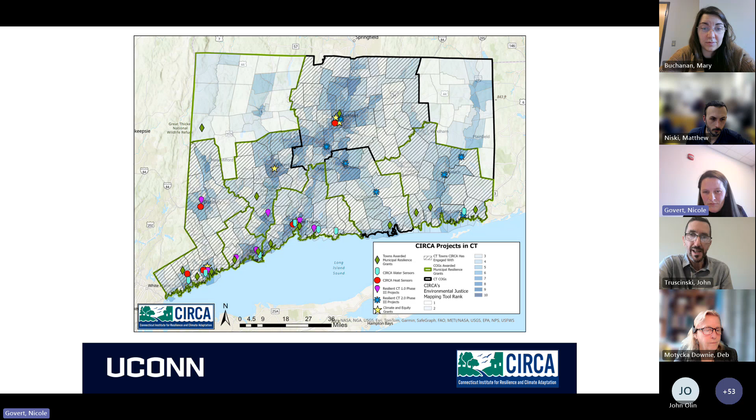I'm going to pass it over to Deb Downie, who is with the town of Stonington, to kick us off with the town's perspective about the flooding issues in Mystic and their participation in the project. So take it away, Deb.

Thanks, John, and thanks everyone. I'm happy to be here today on behalf of our Board of Selectmen and others who've been working hard with Fuss O'Neill and CIRCA on this project. Mystic is a unique area, including portions of two towns, as well as historic, culturally significant residential, commercial, and industrial areas. Its proximity to the sea, the river, and tributaries are both the source of its charm and now the source of ongoing damage.

We've become more aware that for decades, Mystic and the upstream areas continued to develop and expand without much understanding of future impacts. Sometimes temporary structures became permanent with no regard for tidal reality, or regulations required extra large parking lots at some commercial businesses. Amtrak has also altered the shoreline, constricting flow in some areas. The presence of multiple buildings, continuous pavement, and other impervious surfaces have accelerated the extent and incidence of coastal and inland flooding.

These concerns are coupled with the presence of important infrastructure and cultural resources along the river and coast. One of the most vulnerable is our wastewater treatment plant on Edgemont Street near the confluence of the Mystic River and Mystic Harbor. I grew up in Connecticut and spent a lot of time in Mystic and Stonington, and in the past, except for major hurricanes, we never saw the kind of flooding we've experienced in the past decade. We have frequent flooding in downtown Mystic and on the outskirts of the village on Route 1, Route 27, and Masons Island Road, just to name a few.

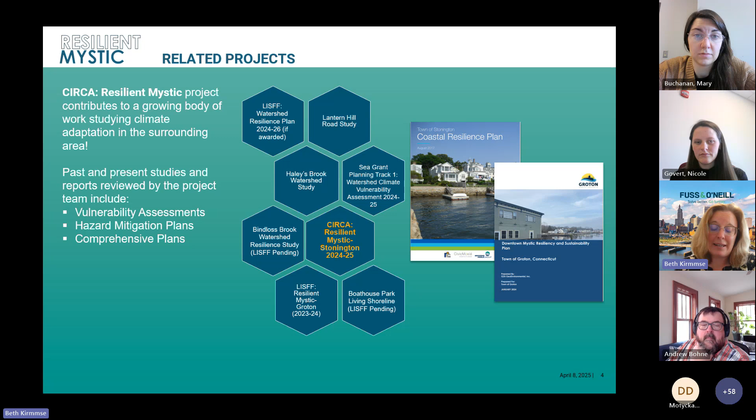When we started this project, we were very much aware of its position within the region, as one of many efforts being put forth or recently completed in the area to think about resilience in the Mystic River watershed and surrounding areas. For example, Groton was funded for a similar study, which wrapped up January of 2024. We started this project amongst a number of things going on, and have sought to coordinate with them where appropriate, in particular through the involvement of the CTAC, that Community and Technical Advisory Committee.

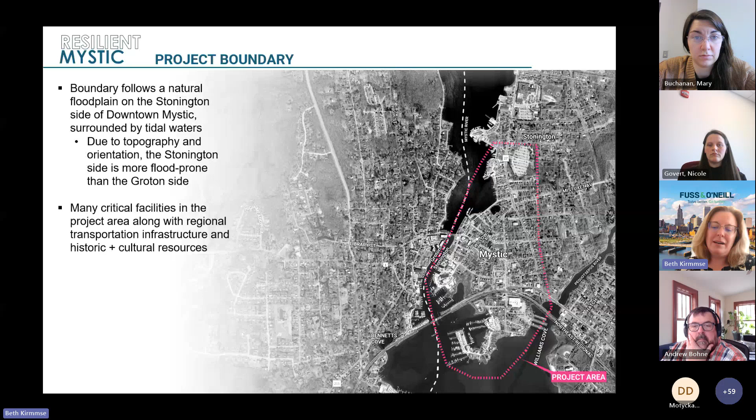So, understanding the risks. The project itself, the bounds of this project, we are looking at the most vulnerable areas of downtown Mystic on the Stonington side, the low-lying floodplain areas. There are many critical facilities in this area, critical transportation infrastructure, 2 major state roads, an evacuation route, as well as the Amtrak corridor.

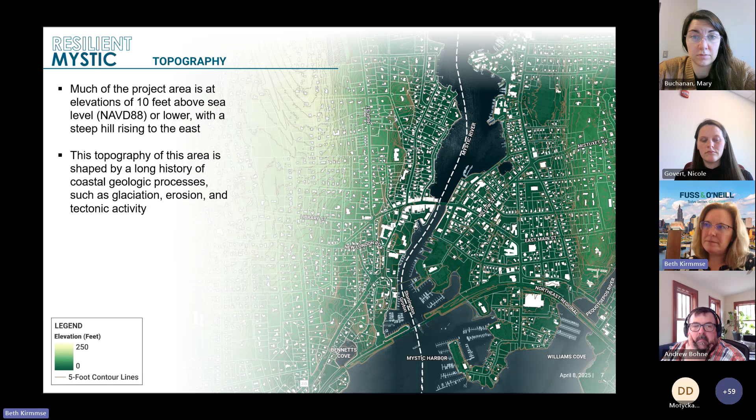So when we started this project, and something that is really important to put forth at the beginning, is that this project looks primarily at sea level rise and tidal flooding and storm surge flooding. Flooding risk that is coming up the river from Long Island Sound. We are very much aware that there is risk from pluvial flooding coming down the hillside that we were just looking at in that last slide, in the lighter green tones. So we recognize that any solution put forth will need to be tested for its applicability to mitigate risk to both types of flooding without exacerbating one or the other.

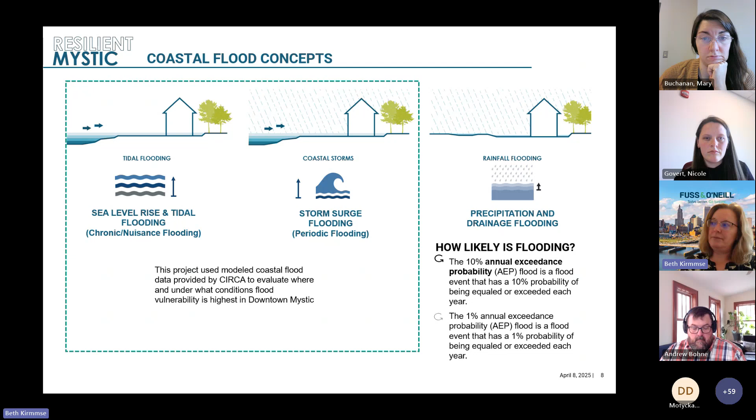Still, our study is focused primarily on what you see in that dashed line. So what are the risks? So what you're looking at here is... I'm sorry, my screen just glitched for a minute. I apologize, let me just bring that back. Apologies, it disappeared here. Oh, I'm so sorry.

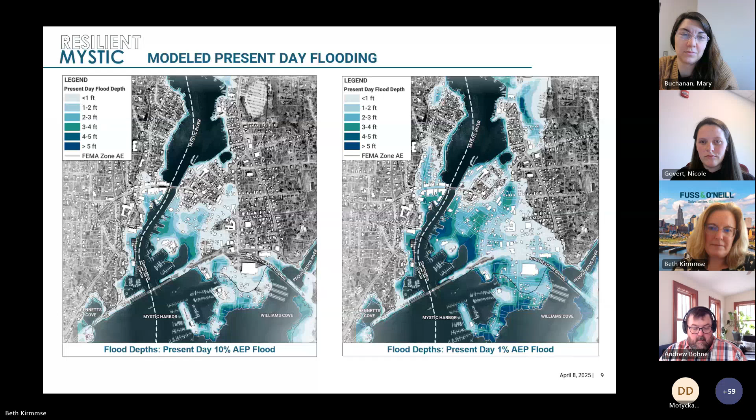Okay, I didn't make the same mistake that time. So with my keyboard, great.

Well, this is really exciting. Now my cat is joining the webinar. We're just going to keep rolling here.

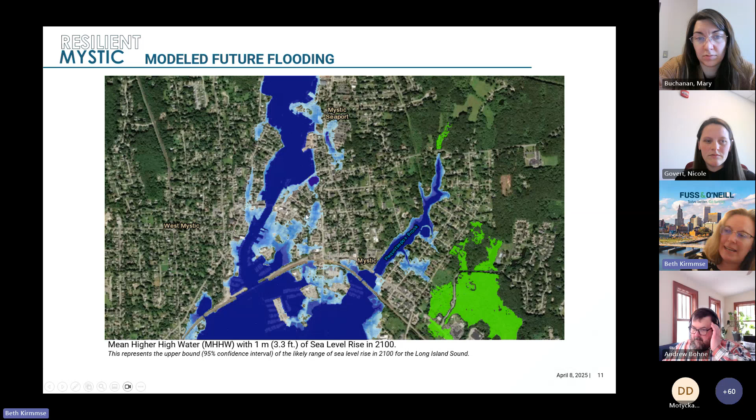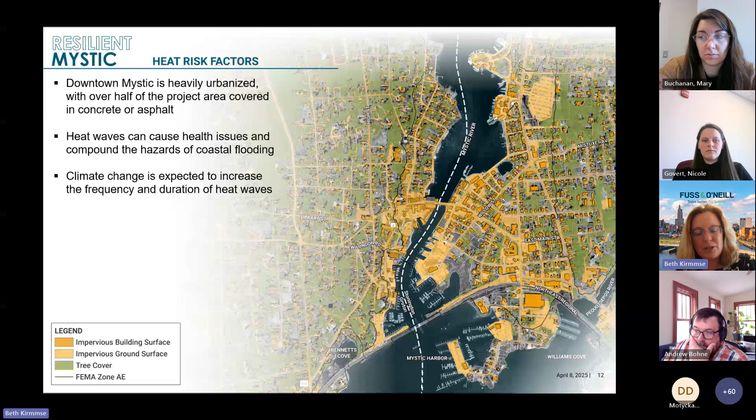Additionally, there are conditions in our built landscapes that exacerbate flooding, represented by a full range of impermeable surfaces. Those impermeable surfaces tend to contribute to extreme heat events as well. So in looking at flooding risk in downtown Mystic, we're also able to look at extreme heat risk at the same time. When considering nature-based solutions, we're hoping to provide mitigations for both.

So what's at risk? We're looking at a map of the Mystic River area, showing our project area in the floodplain, bound by the hillside on the right.

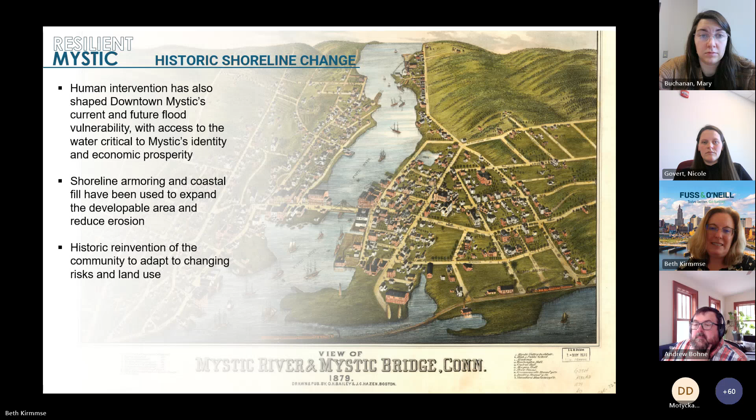Flooding in Mystic can cause physical damages to structures and their contents, human impacts such as residential displacement and injuries, direct or indirect business impacts, and reduced functionality of public and essential facilities such as fire stations, rehabilitation care facilities, and churches.

This map shows the vulnerability in a 10% annual exceedance flood event to a variety of land uses. Residential is in yellow, industrial in purple, and commercial in that pinkish color.

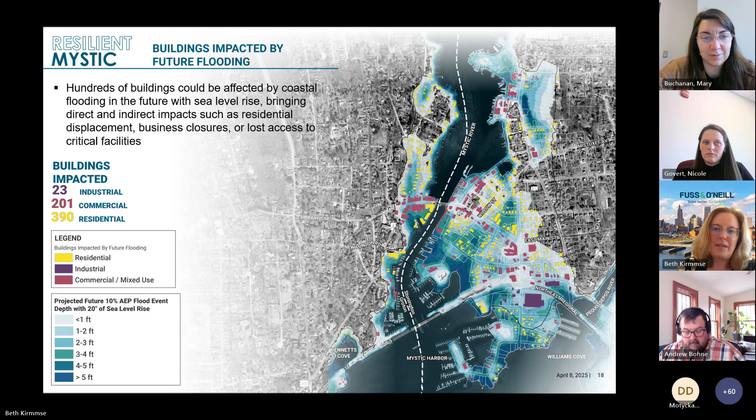Coastal flooding in downtown Mystic also brings severe impacts to critical transportation corridors. Route 27 is an evacuation route. Route 1 is a very important corridor between Groton, through coastal Stonington, and the southern edge of the town of Stonington. Additionally, the Northeast Corridor trains stop in Mystic daily, you can see the train station icon here, and here's the Northeast Regional Rail line.

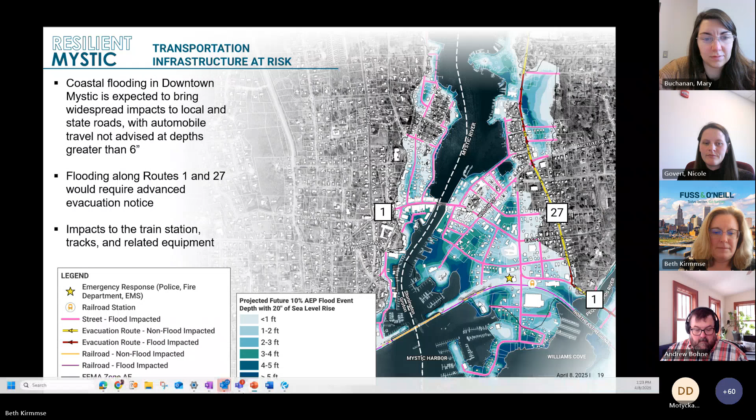So what are the regulatory areas we have in this area as well? We wanted to be cognizant of all the different overlays and permitting processes that would need to be engaged in order to mitigate flood risk. We're looking at a federally regulated channel, wetlands on the National Wetlands Inventory, FEMA zones, a town-managed shellfish bed, etc.

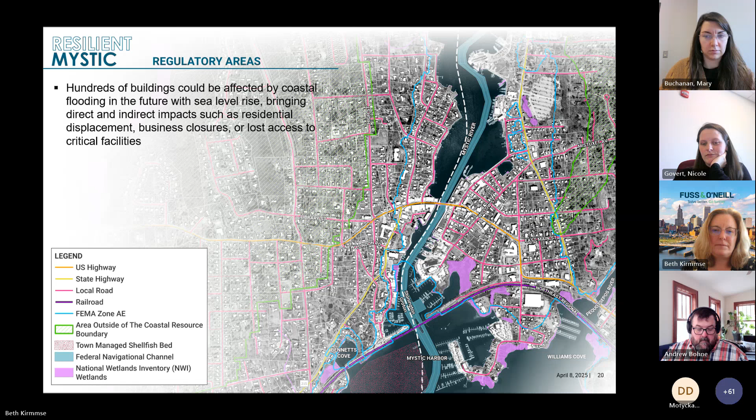As we mapped this and thought about critical infrastructure at risk, there's the wastewater treatment facility, storm drainage, and public drinking water supply lines, all of which are separate services but all at risk. And when they are at risk, they could end up impacting one another.

My cat would really love to be a part of this webinar.

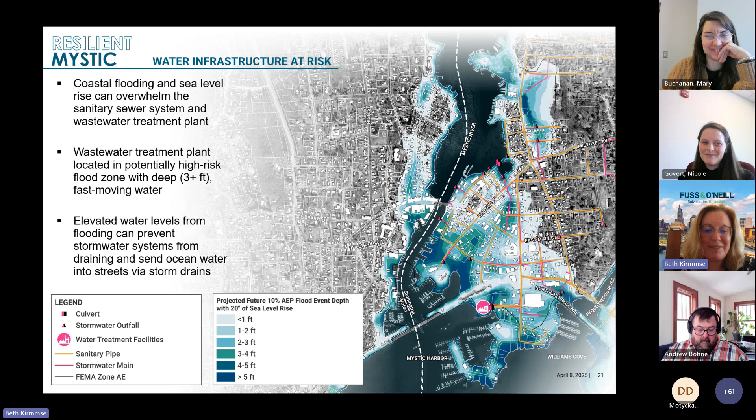Additional critical community assets were assessed through the planning and assessment phases of this project, and we identified a number of facilities. Most importantly, that hot pink dot, number 4, the wastewater treatment facility.

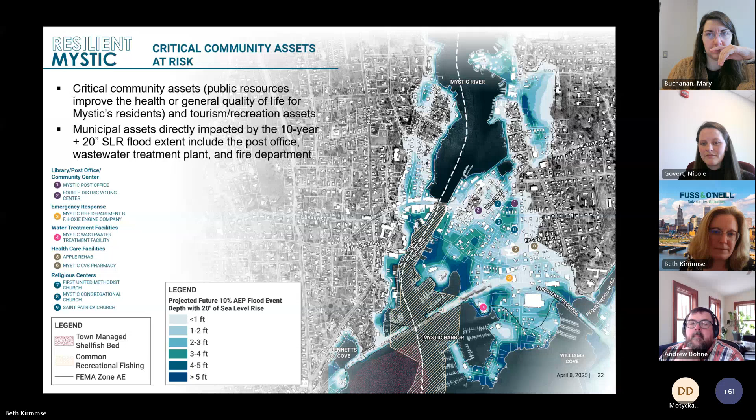We also looked at historic resources at risk. There are a number of historic districts that surround this area, but it's of note that the downtown area in our project area has not been part of a district overlay, although there are a number of facilities in that area on the National Register of Historic Places, a federally recognized designation.

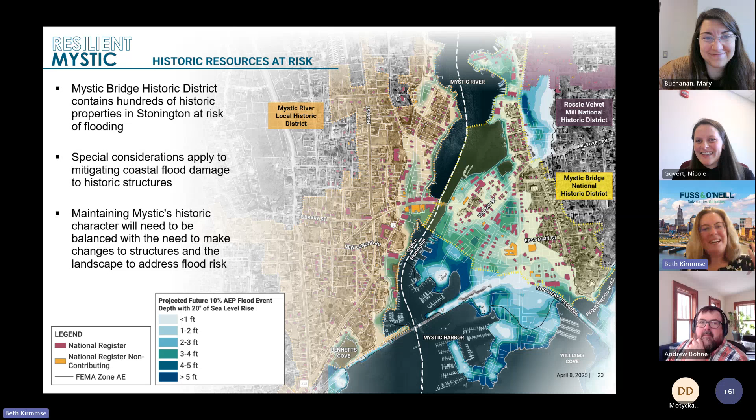Perfect. I'm about to hand it over to Andy for the workshop summary.

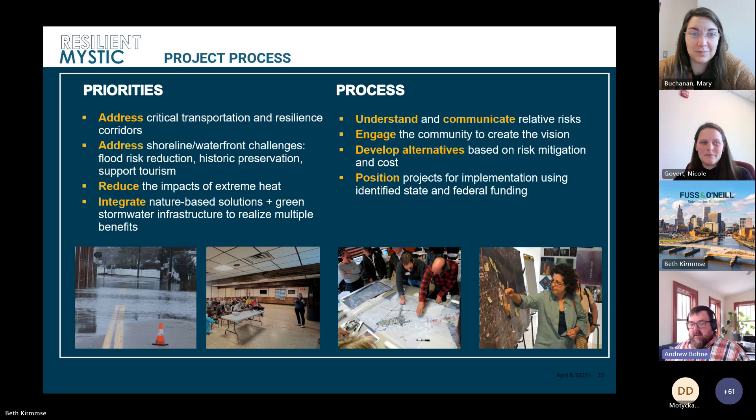So the workshop was really designed to be an inclusive engagement event that allowed as much access and opportunity for the community at large to be part of the process.

This was done over a period of 3.5 days with a variety of workshops, walking tours, visioning exercises, open houses, and then a final presentation.

You can just click through these. This is some representation of some of the workshop events that we had, the information that was gathered, and different focus groups that were integrated into the workshop.

We do a lot of visualization boards, really trying to engage the community in a sense of design language. We asked people to weigh in on the intent.

With the red dot, green dot for different areas, we got a gauge for what people like, what they're interested in seeing, what the aesthetic looks like, so we can start to use this in a variety of different ways. Very good engagement, really good feedback, got a lot of community involvement.

Beth, the next piece is the historic resources. Do you want to jump into that? Sure, I'll touch briefly on this.

As I mentioned before, there are many National Register listings in Mystic, so we looked at ways to think about what has come before in terms of other places addressing the same thing. We looked specifically at Charleston and Newport, looked at their regulations, and thought about small scale adaptation.

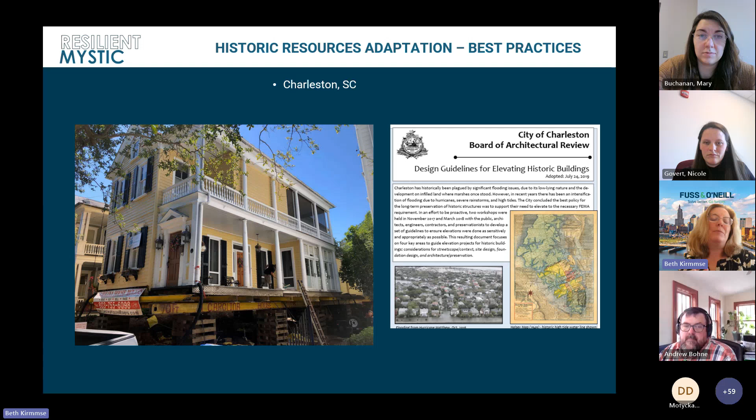The historic nature of Mystic is one that has changed over time, but each time it changes, pieces of what makes Mystic and gives it that historic character have been held onto, even when they need to be reshaped to meet changing cultural needs. The last time it was reshaped significantly was when the shipbuilding industry was exiting, but Mystic chose to hold on to some of their historic assets by relocating them strategically.

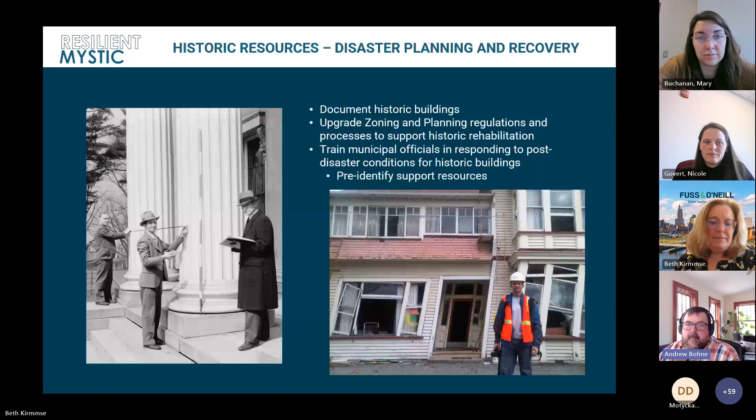I'll go through this as quick as I can but still be concise. Generally we focused on a series of areas to do a deeper dive into understanding what some of the flood mitigation and adaptation strategies might be.

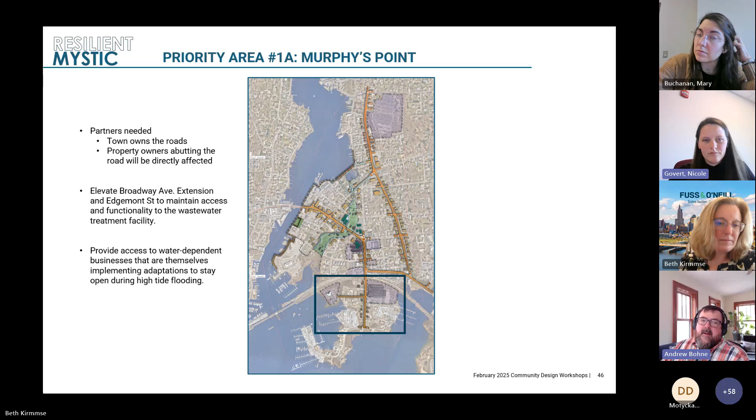In priority one, we looked at Murphy's Point on the south side, really looking at opportunities for elevation of roads and doing everything we could to maintain critical access to the wastewater treatment facility.

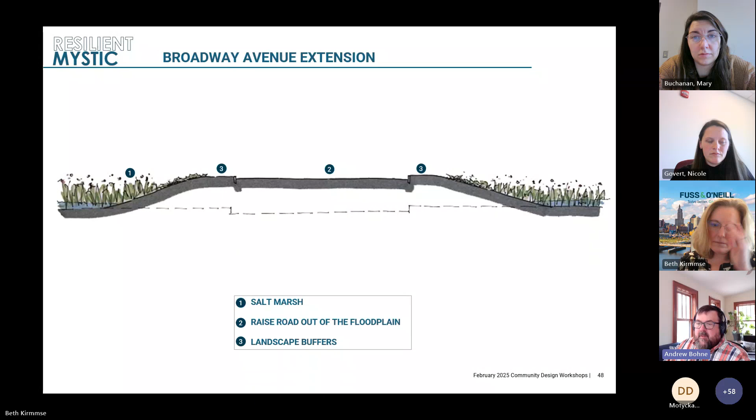The next slide shows a bit of the intent of the road elevations and what this could do to make sure we have access off the site. The next zone we looked at was just north of that, again looking at opportunities for elevating roads where we could. Are there opportunities in this zone?

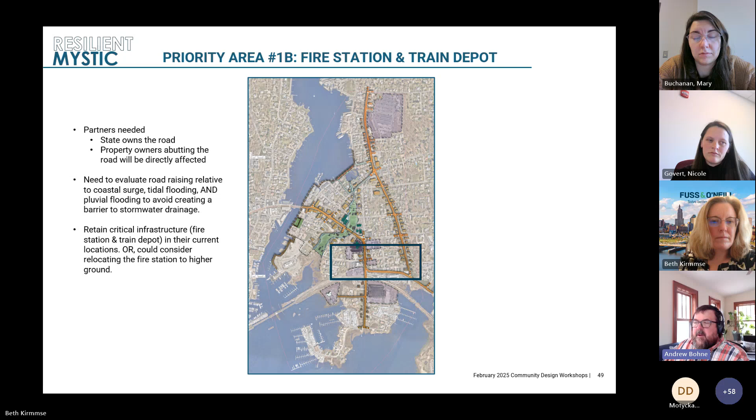For allowing the water to come in certain respects into certain areas, looking at potential opportunities for strategic acquisition, relocation, moving critical structures out of risk, and also looking at infill in the same capacity.

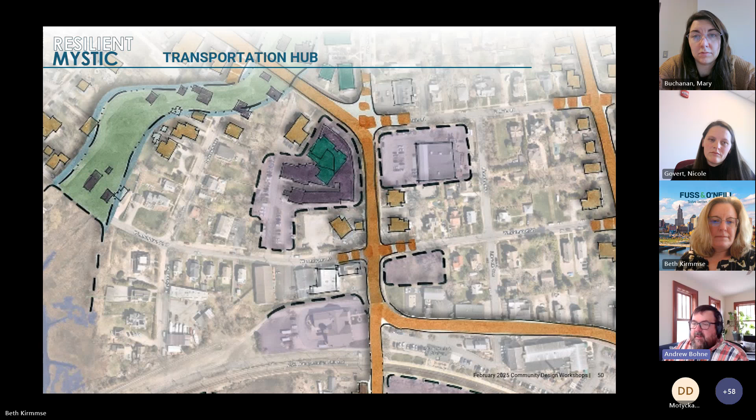The next area we looked at was Main Street, really looking at what we could do to strategically identify infill opportunities that were resilient in the face of this changing climate.

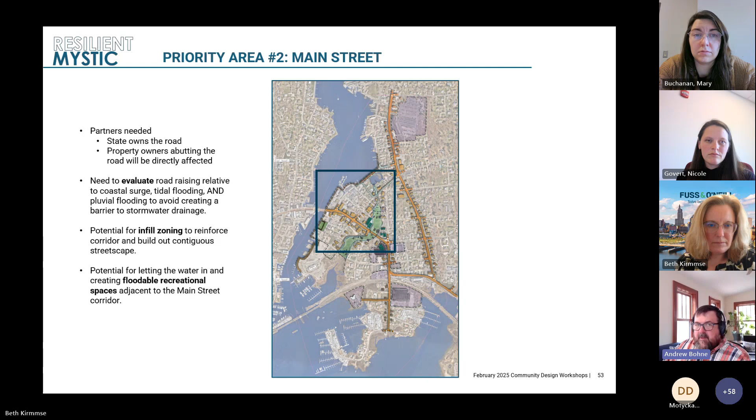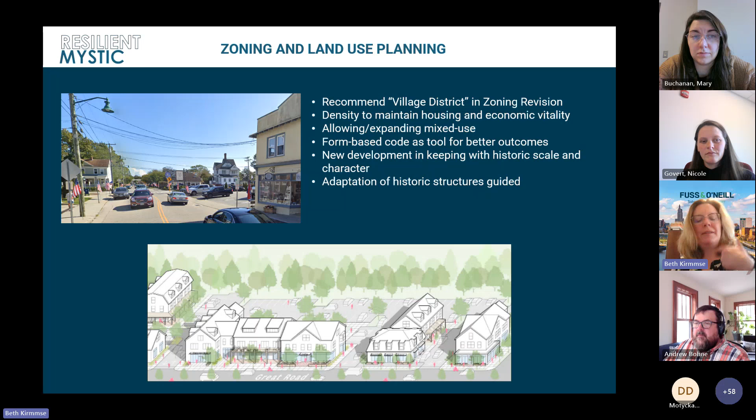One of the ideas was that infill piece where there's potential change that could be led by zoning regulations, put in place as that baby step now that incentivize change over time. And looking at road infrastructure as it is today, and the potential discontinuation of vehicular traffic, converting it to multimodal and pedestrian traffic.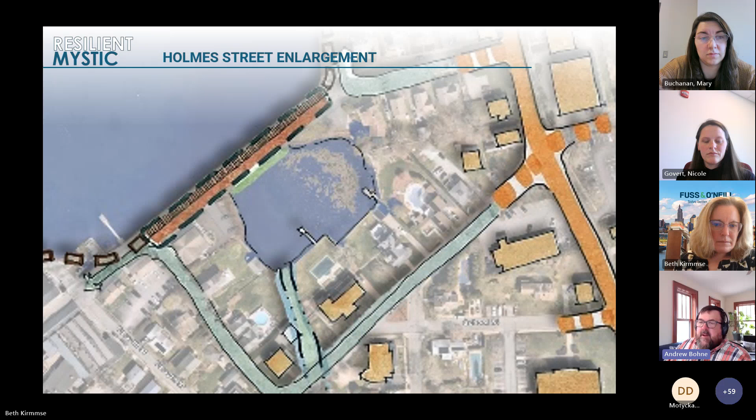This shows the different graphic representations of what Holmes Street could turn into, while still allowing those floodwaters in.

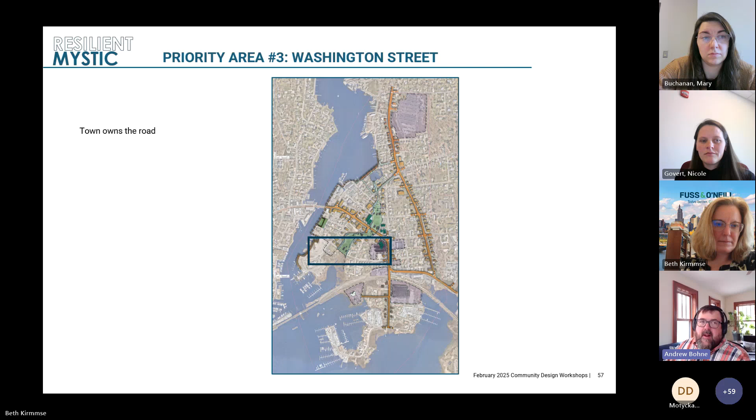Priority Area 3 was the Washington Street area, and the town owns the road here, so we looked at what elevation could look like to give a level of protection, understanding and exploring what that looks like.

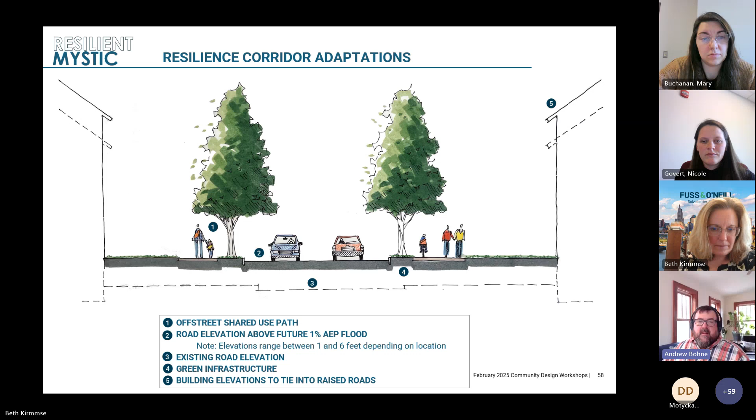If the road comes up, what buildings need to come up to make sure we meet that elevation, to still have that historical context was a key component to that.

Also looking at the green infrastructure and the streetscape around this area, and how we could let that water come in over time, but knowing it's not going to be underwater all the time. So still using it as a high functioning, high value landscape.

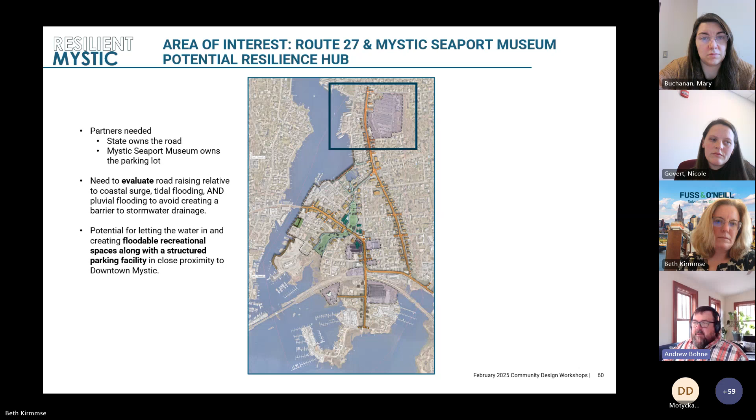The last area we looked at was on the north side of the project area, around Route 27 and the Mystic Seaport. The state owns the road here, and the Seaport Museum owns a very large surface parking lot. So we looked at opportunities here to zoom in and provide opportunities for that road elevation.

Road elevation, consolidated parking, potentially a parking structure, lots of green infrastructure, multi-use landscape, allowing this kind of floodable landscape to function, and still potentially converting some of the surface parking lot into a living laboratory outdoor landscape for the community and for the seaport to use moving forward.

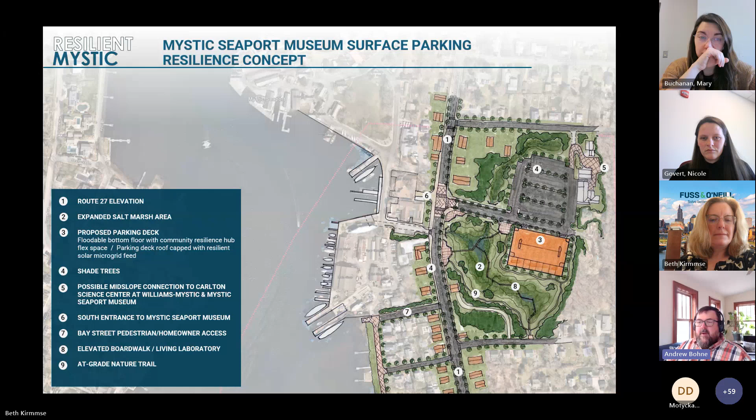Thanks, Andy, for running us through that so fast. These are in-depth concepts, so we're just hoping to hit the high notes in this webinar. But we do still have an opportunity if you want to take a look at our project area.

We're still accepting input from the community. If you want to provide input, we have the project story map, and you just click to open the points of interest map. There you can drop a pin and provide us any input you have, either as a resident, someone who works in Mystic, or someone who visits Mystic. Since tourism is such an important part of the Mystic project, it's important to hear from everyone, even if you don't live or work in Mystic.

You can also upload pictures for the project's use, and this will be handed over to CIRCA at the end, and to the town of Stonington, used for gathering and positioning future projects for funding as well.

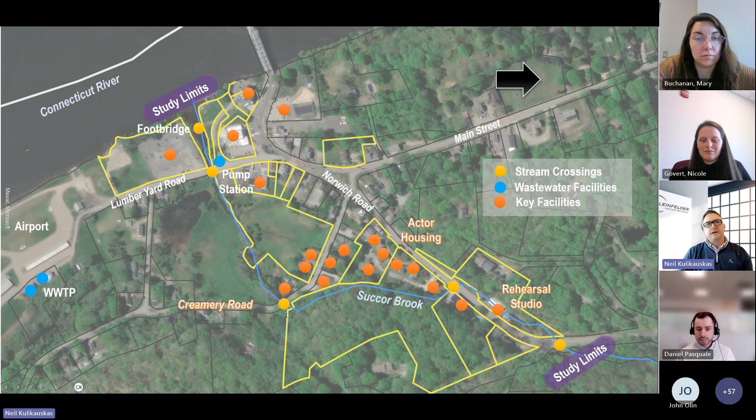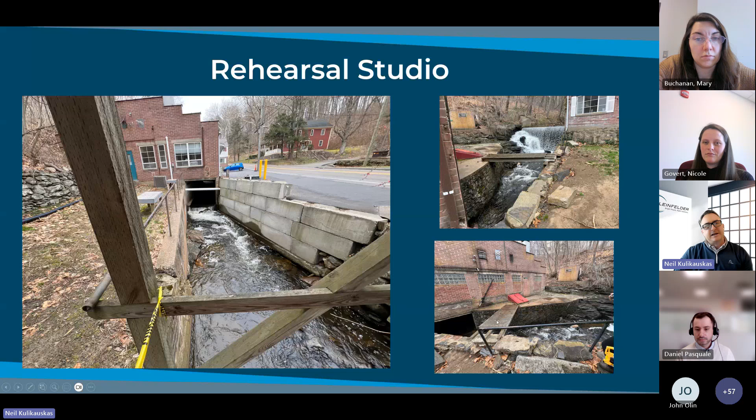So again, moving on here, just to give you what we're dealing with, this was our site visit. This is the rehearsal studio. As you can see, the stream is culverted beneath the studio. The picture on the left is really the outlet of it. Just upstream there's a small dam here. Again, as John mentioned, it was an old mill town, constructed dams and these constrictions to really harness the power of the water. Then down on the lower right, this is basically the inlet to that culvert. So a real challenging space here.

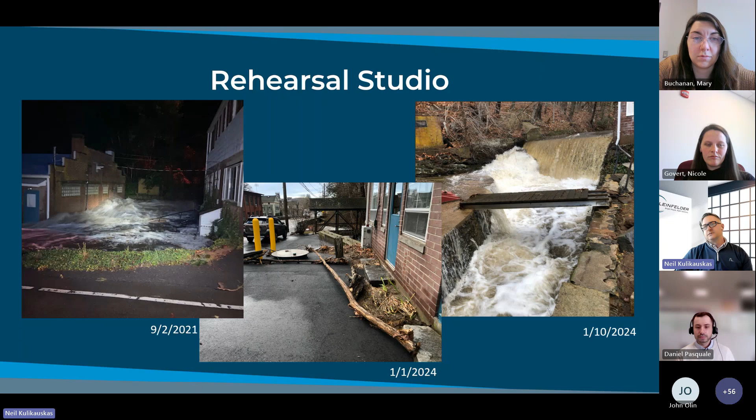Let's advance. Okay, I mentioned the actor housing area. So again, here you have some newer properties built along the floodplain of Succor Brook, as well as some historic properties that are affected as well.

So again, some of the flooding impacts we've seen from these properties — this is from September 2021. That same September flood caused major flooding around these properties and Norwich Road, as you can see from these photos.

And then this Creamery Road crossing — you can see this is a typical box culvert that you see all over the place in New England. You can kind of see just at the normal water level it's really creating a constriction of the stream, and we'll see how that constriction exacerbates some of the flooding issues within Succor Brook.

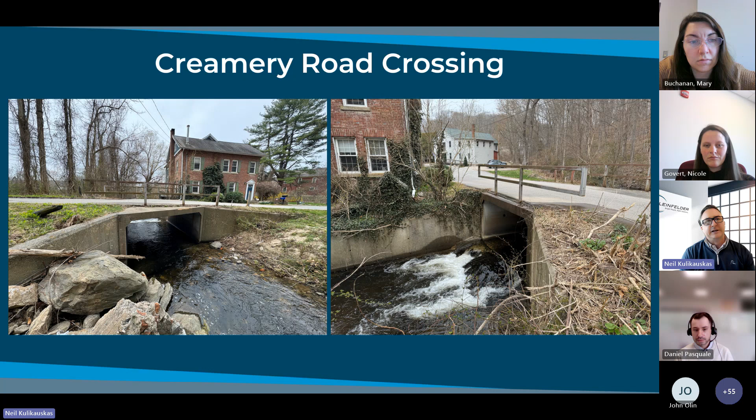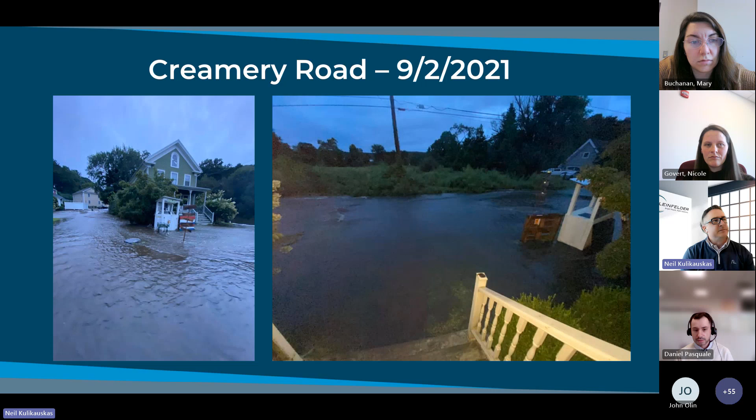And then we've got a couple photos of the properties adjacent to and surrounding this Creamery Road area. Again, during the September 2021 storm there was major flooding through this area. And more recently, in January 2024, we were able to see evidence of overtopping of this culvert — you can see the debris caught up on the surface, which shows that the whole culvert overtopped fairly recently.

So that's the overview, and those are the areas we're going to focus on.

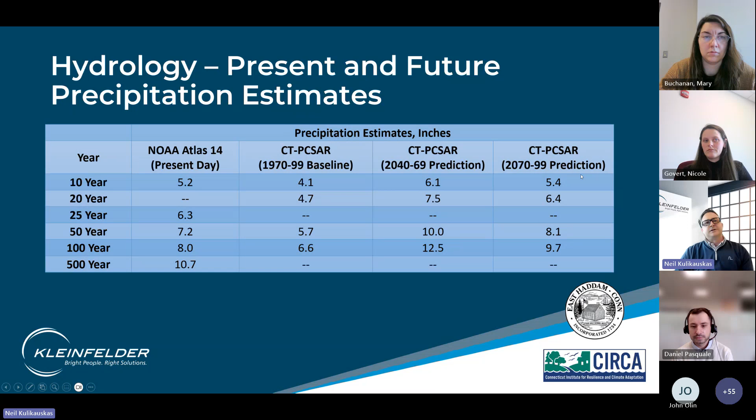Now I want to talk quickly about the modeling we did. At the beginning, for the hydrologic work for present day, we used the NOAA Atlas 14 precipitation, and for our future estimates we're using the PCSAR predictions. You can see significant increases comparing present day to the PCSAR mid-century prediction — the 100-year storm goes from about 8 inches to 12.5 inches. It's notable too that by late century these numbers actually go down from mid-century, based on the climate models.

So what does that look like for flows? Again, present day is in this bottom row, and we looked at a few different methods to calibrate our analysis and make sure we understood what each method showed. Present day, we're looking at flows for the 100-year event around 1200, and mid-century as high as 2400 — a significant increase.

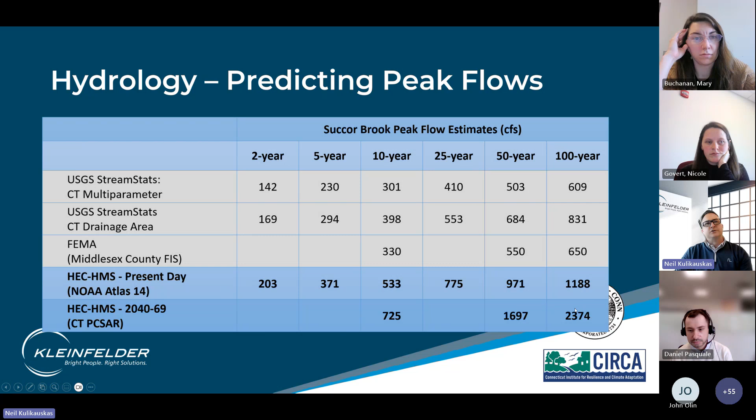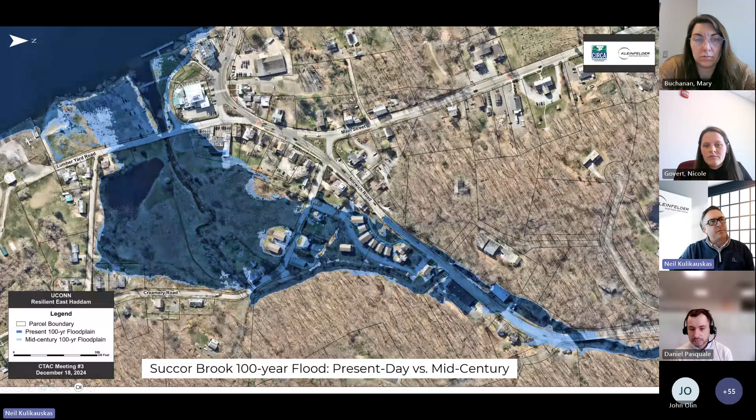So what does that show? This is our study area — the change in the floodplain for the 100-year event from present to mid-century. What you can see is the floodplain itself doesn't change that much. The most notable area is this lower right-hand section, where the bridge starts overtopping and creates additional floodplain, and a bit at the mouth of the Connecticut River as everything spreads out. But within the reach, the floodplain is pretty close. And these are all the different assets and facilities within the floodplain that are being affected.

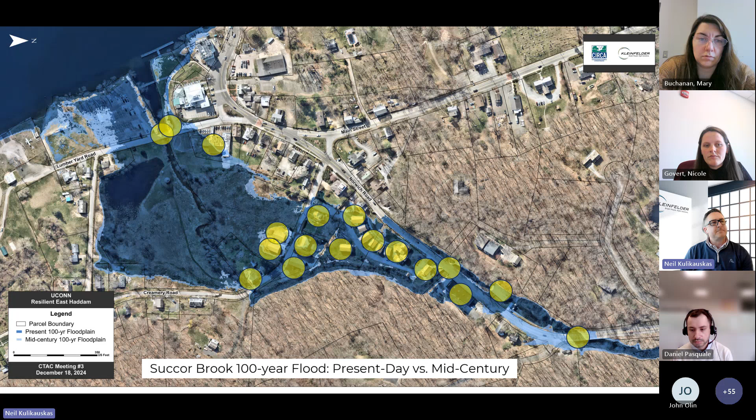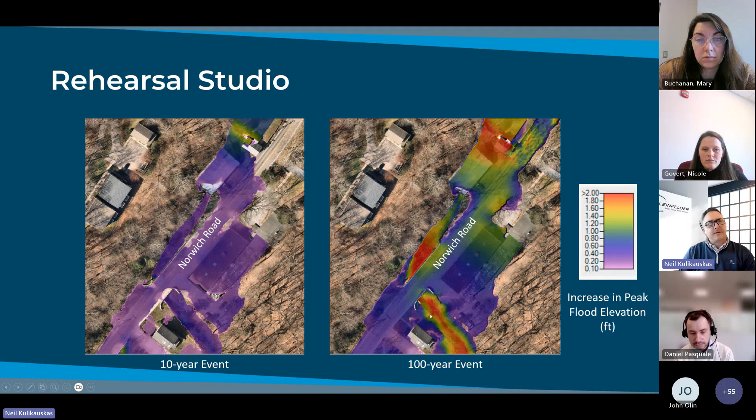What's shown here is the actual relative increase in the 10-year event from present day to mid-century. So you're seeing a small relative increase on the 10-year and a much larger relative increase on the 100-year, in particular within the channel and this area upstream of the rehearsal studio. You're seeing significant increases in the relative flood elevation between present day and mid-century.

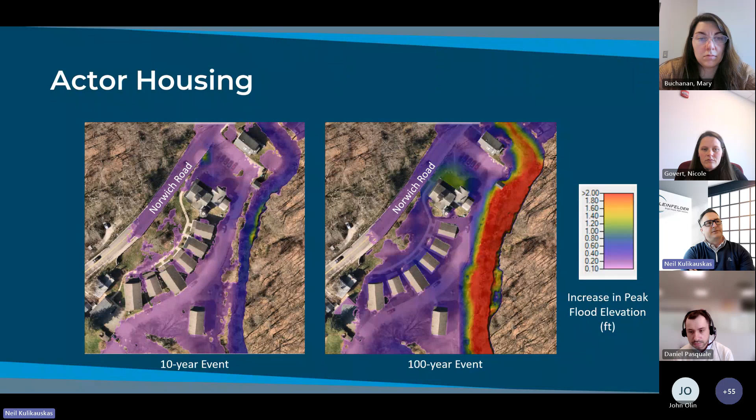And then again, this is the actor housing area that we talked about. So for the 10-year, you're seeing increases throughout, and then very significant increases in the 100-year, mostly contained in the brook, but definitely creating more of an increase throughout the entire floodplain.

And then Creamery Road kind of showing a similar scenario. So these are the things that, as we're trying to establish the existing conditions, what's going on, this is the type of modeling that we were looking at to really see does this support what's been seen in the past. Yes, no, and how does that apply to how we're going to predict what's happening in the future?

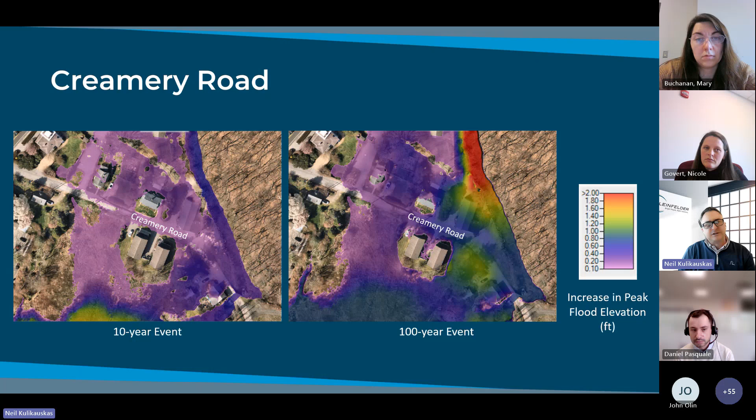So adaptation strategies. Focusing on these three areas, this is really just kind of tip of the iceberg here. We looked at a lot of different strategies, but I'm going to focus in on these three.

The first thing we recognized was the rehearsal studio and that constriction there, and really what issue it was causing. Second, we looked at how to protect, what's the most economical way to potentially protect this actor housing and residential area that's upstream from Creamery Road. And then looking at Creamery Road, knowing that's a constriction, what's going to happen if we want to replace that—it's a local road, and it's definitely a constriction. What are the effects of that?

So these are some of our preliminary concepts here. We're actually still working on finalizing these, so you're getting to see some of it. It's not a final product, but certainly helps portray what we're thinking here.

So essentially in this picture here, it's tough to see, but here's the rehearsal studios essentially right in here, and this kind of comes around here. What we're going to do is remove the rehearsal studio and essentially restore, reconstruct a more natural stream bed in this area.

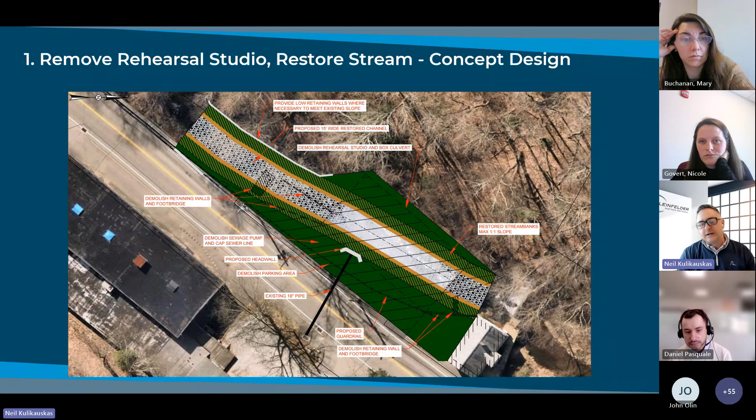And again, there's a lot of different work involved here. So as we're putting these together, we're coming up with essentially conceptual cost estimates too. We got to really understand what's involved in doing this type of work.

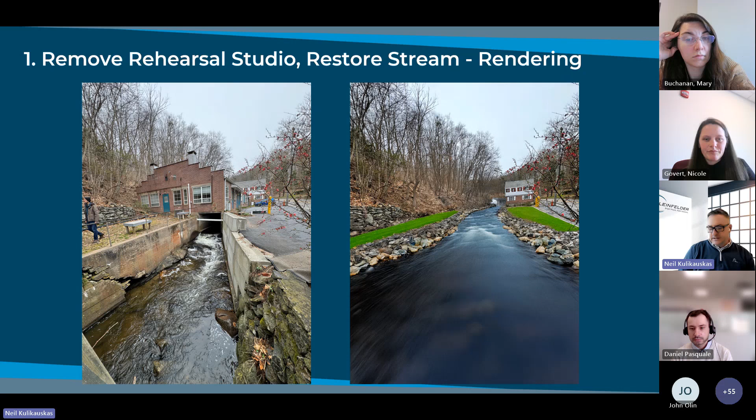Here's just a little bit of a rendering that we pulled together, just for the public to understand what it might look like in the future. So you see this channel here, very constricted on the left, and essentially we're able to widen it, armor it, give it some width, give it some depth, make it a more natural stream channel. Just an idea of what it might look like if we remove that rehearsal studio.

So next we looked at, okay, what if we build an earthen berm or perhaps a structural flood wall along Succor Brook and try to reconstruct the driveway that's the entrance to the housing, to kind of form more of a flood berm there to keep the overtopping from the channel from spreading out into that floodplain. What would that look like?

So this is a little example of that—just another visual of what that earthen berm might look like, or the actual flood wall. We were looking at like a 6-foot height to control the flows we wanted to control.

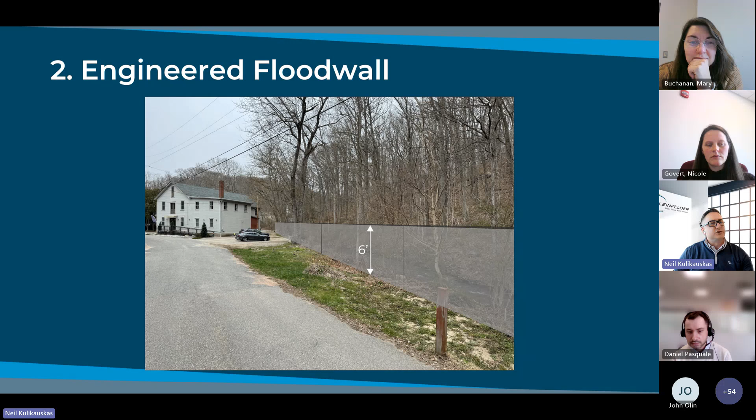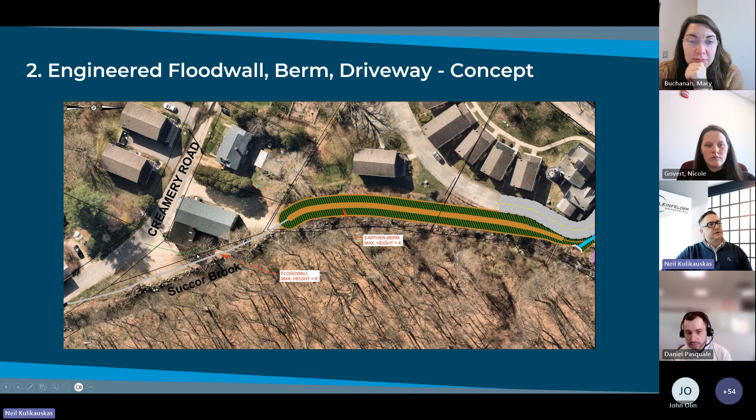Looked at this driveway. If we raised it, what would that look like? How would that affect the parking lot that's adjacent there? Essentially you can kind of see here between these three, you're forming this wall, this berm, all along this border of the brook here. And really the town was really focused on implementable projects, like what can we do now to solve this problem?

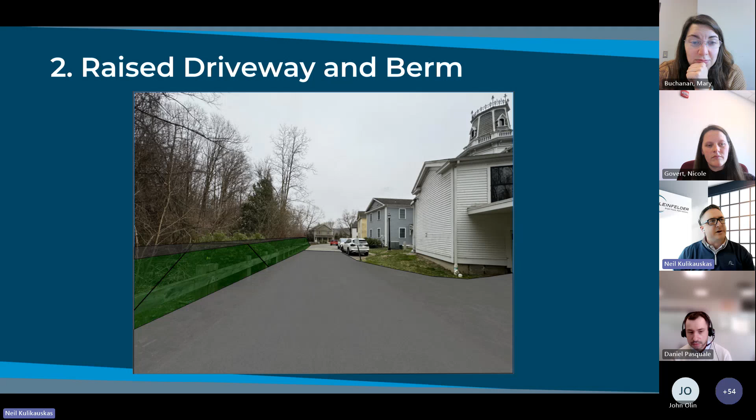There's just another view of how that driveway might transition into that berm. And then the culvert, I think we looked at, was 12 feet wide. To size that properly for the flows we're seeing, we were proposing converting it to like a 24-foot span structure, likely a small bridge here, and we'd have to do some improvements to the upstream, downstream wing walls, the stream channel, et cetera, to improve the hydraulics through that crossing.

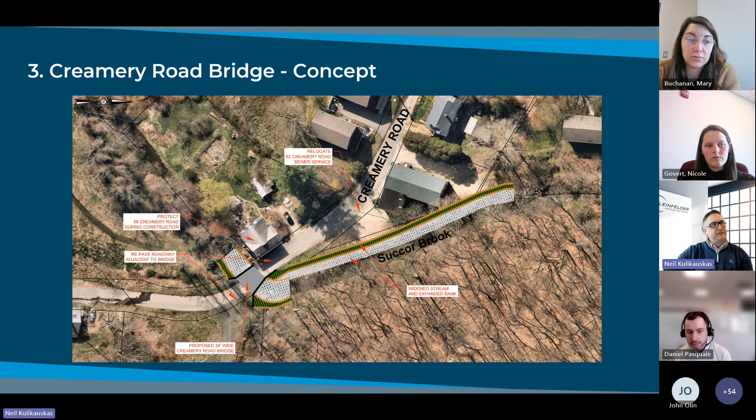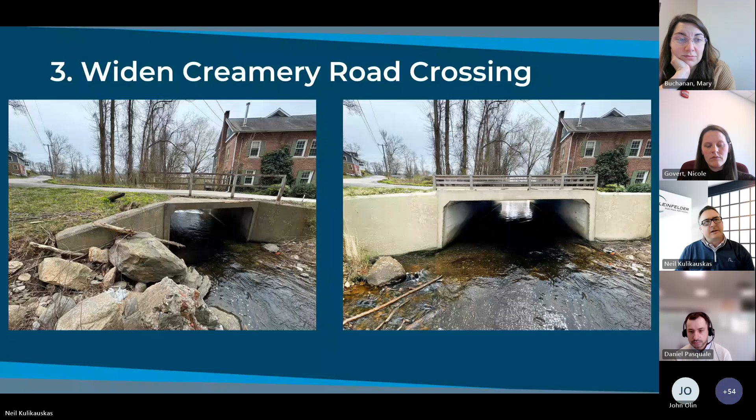As you can see, you've also got a property that's really right adjacent to the crossing. So again, just a little rendering of widening that culvert, what that might look like, and what are the impacts.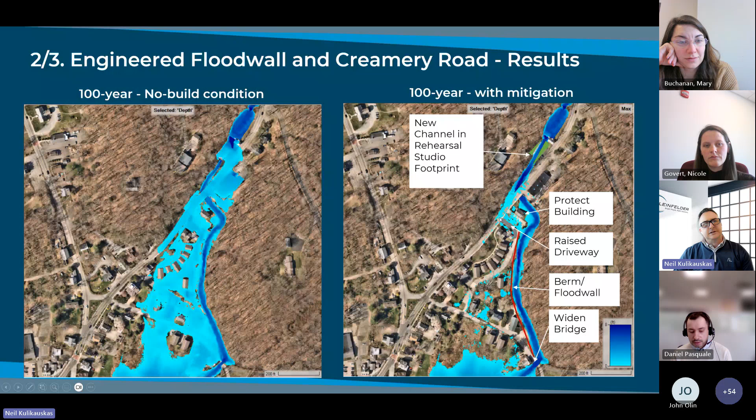So that's the end of the presentation. I did fly through it a little bit, but I think hopefully I covered mostly what we wanted to. And again, there's a lot of things we didn't touch on, additional mitigation strategies.

We're developing budgetary costs, doing a benefit cost analysis on all these adaptations to make sure that they make sense economically, given the town, our final recommendations and the priority of those recommendations, opportunities for funding, how they might get certain funding programs to help pay for these projects, and giving them an idea of timelines for implementation, what to do first, what to do second, et cetera.